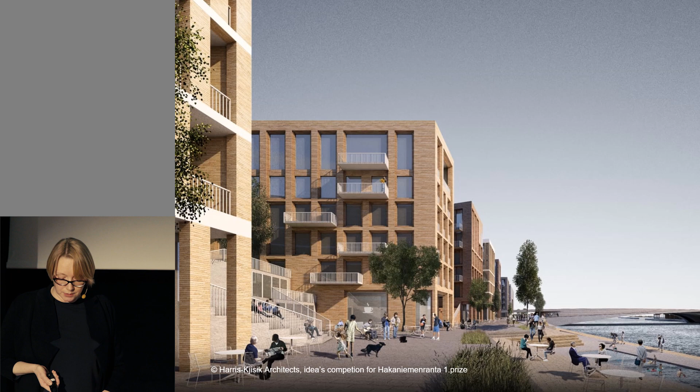Even though the quality of building, particularly considering the elevation design, has since improved a lot, and there's definitely much more effort put into the design and execution of public and semi-public spaces, inside the buildings not that much has changed. The construction methods are rather similar, and the housing design still follows quite the same trajectory, meant to solve very different kinds of challenges than we are facing today.

In the heart of all this lies the efficiency and optimization demand, which is already questioning the interest of people and their well-being. We are also making more and more efficient dwellings in a way which is making the buildings more inflexible. When the buildings cannot adapt to new and emerging needs, they vanish.

We are already experiencing this as consequences of the suburban construction period, whose bills we are still paying. There is a need for an ambitious learning and developing curve in spatial production culture so that it will be resilient in the long run. How should we change the background assumptions and enter the resilient path?

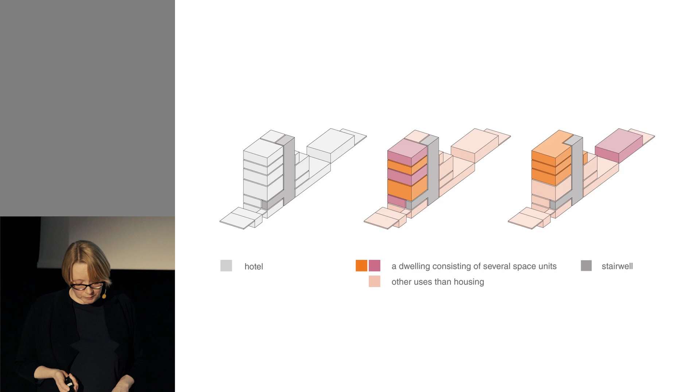What is essential for them is the appropriate relationship between the circulation properties, the stairwell, and the spaces it feeds in. Because of the optimal span and scarce use of carrying walls, the spaces can be divided into smaller units, and every unit has potentially its own entrance door, so that they can also function independently from each other and can be used in multiple ways for different uses. This solution cannot be viewed as very efficient in Finnish housing production demands, but it gives immense flexibility for the whole building.

I see that we should move towards this kind of space unit thinking in which we do not anymore understand dwellings as 1 room, 2 room, 3 room dwellings and so on, with fixed boundaries and uses, but spaces could be formed from independent space units according to needs in different times. This would not fix the building stock to certain spatial configuration and uses, and we wouldn't be building the wrong kind of houses in wrong places. Instead of making the singular dwelling more efficient and optimizing the wrong component, we could, through space unit thinking, have the whole building stock in efficient use according to respective needs.

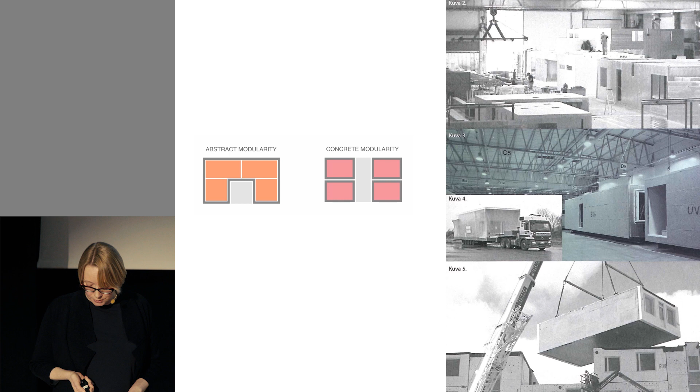What I mean with space unit is not a modular construction unit for easy construction. These kinds of buildings can also be very inflexible in use. I call for space unit thinking which is based on abstract modularity, in which the units can be connected and separated even though the boundaries are not yet so precisely defined and fixed, so that they do not prevent the connecting of spaces.

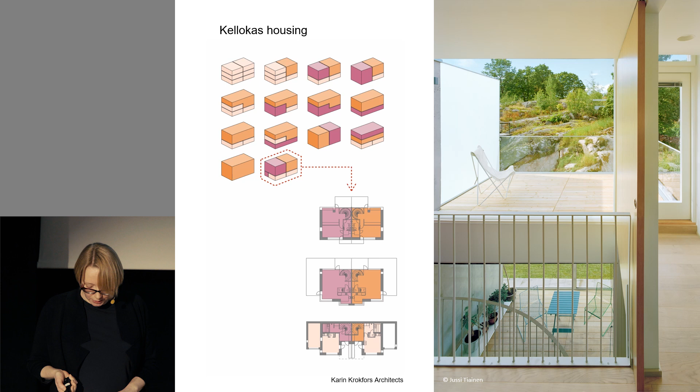Here is a building design of Kellokas housing in which I have used space unit thinking. The building can be divided into 6 dwellings or be used as one big house and everything in between. Some of these units can be used as workspaces, even as commercial space on the ground floor, because they have their own entrance properties and big windows. It is also good to notice that flexibility does not need to be anonymous in its character. It can have architectural identity, which is the food for meaning creation in our human lives.

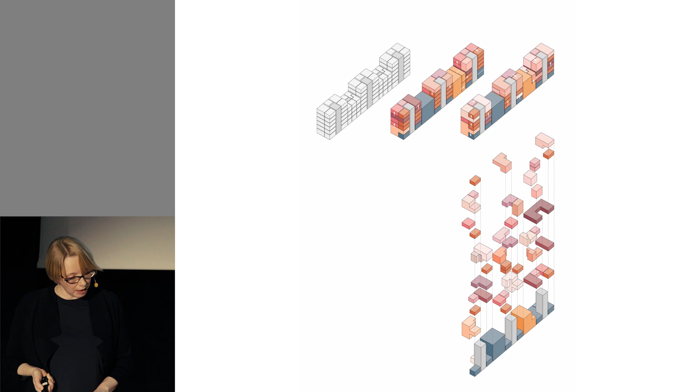The space unit thinking can be applied also to bigger apartment blocks, in which it gives even more possibilities for different ways of connecting and separating space units. The dwellings can grow and contract even in vertical direction, and the permutations are endless. The more connection possibilities there are, the better the buildings can adapt to changes. People can rent or sell parts of their dwellings away and vice versa in different life situations.

Nowadays, people need to make the biggest changes in their living conditions when they are most vulnerable. When a partner dies, they get ill, divorce, or get unemployed. Often these contexts affect our lives only temporarily, but as a consequence, people need to move away from familiar surroundings, change schools, or move further away from friends nearby, which is particularly difficult for elder people. They could, for example, live longer in their homes, which have become too big to manage, and get resources or help by selling or renting a part of the dwelling away, as one example.

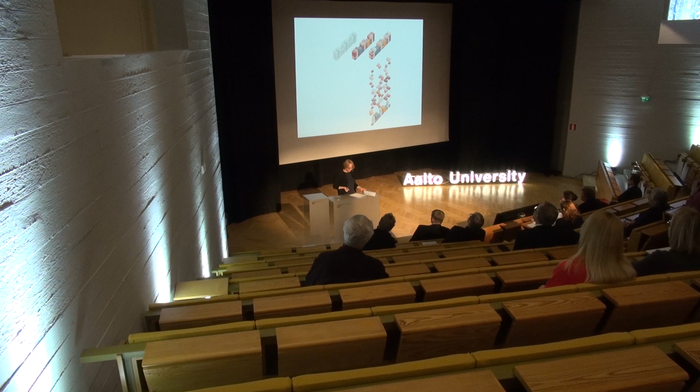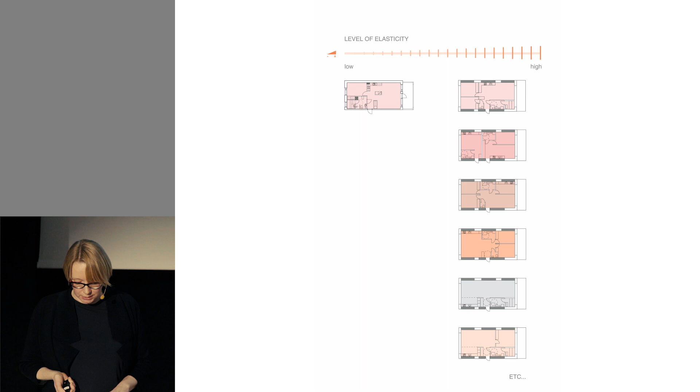To support the new space unit logic and people's differentiating needs and aspirations, there is a need to be able to reorganize the rooms and the spaces inside the dwelling as well. On the left, there is a typical 3-room dwelling produced today, whose room organization cannot be easily adjusted. On the right, there is a dwelling based on a new kind of design thinking, which gives deciding power to the inhabitants over the space they occupy, how they want to use it, how they want to divide it. This demands new kinds of flexible ideas also for technical installations and other technical features.

We can reformulate the question portrayed in the beginning, how to make resilient built environment, as how to make buildings living. To pinpoint the aspects of living buildings and living built environments, they should comprise the dynamic interface between the buildings and the urban contexts, the flexible and adaptable spatial characters designed for buildings, and that the built environment is experienced as meaningful by people so that they want to preserve it. This is linked to its high architectural quality. The longer span for buildings we aim, the better it should be.